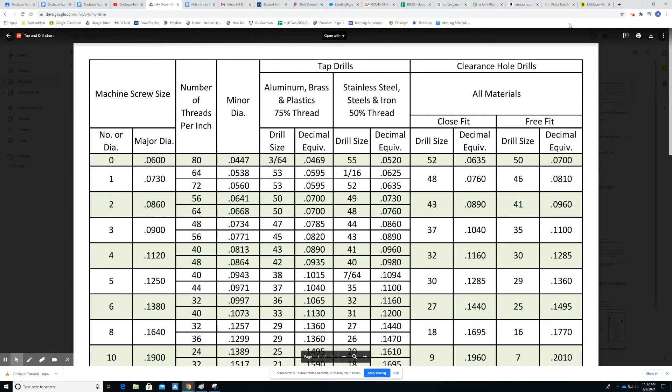All right, so for today, what we want to do is create a hex-shaped pocket in the back here. We're going to extrude that into the shape. When we assemble this U-joint, we're going to 3D print a couple of them and 3D print our swivel. And then we're going to use number 8 machine screws, but they can't go all the way through because then they would collide. You have 2 of them that need to share the same space in the middle.

So by putting short screws in here, and putting a nut here that they thread into, the screws will stay in place and they will hold the swivel, and the whole piece will be held together. This isn't how an actual U-joint would be drawn. We're doing this so that we can 3D print it and have a working U-joint.

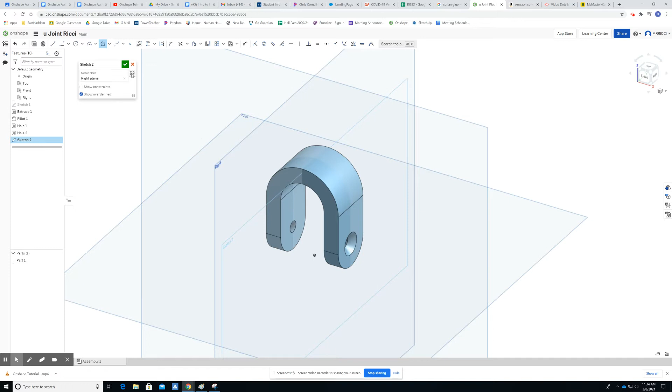All right, so what I'm going to do now is create a new sketch. Say okay to that hole. What did I do there? I did free fit. So I want to make sure that both my holes are free fit. They are. Good. Now I want to go to my sketch. I'm going to go on the right plane. And I'm going to pick my polygon here. I'm going to put that polygon right at the center of our through hole here.

I'm going to rotate this so that the polygon snaps so that the top edge of the polygon and this edge are parallel to each other. Okay, and then as I move away from the polygon, you can see that the number changes. That is how many sides our polygon has. So I'm going to move close so I get 6. It's a hex. That's how many sides our hex bolts have on them.

All right, and then I want a number 8 machine screw nut to fit into this pocket so that when we thread our machine screw through, it stays in place and it sandwiches it in here. And so to know the size of that nut, I need to use a reference for that. And what I like to use is McMaster-Carr. This is a website that sells just about any mechanical item that you can think of.

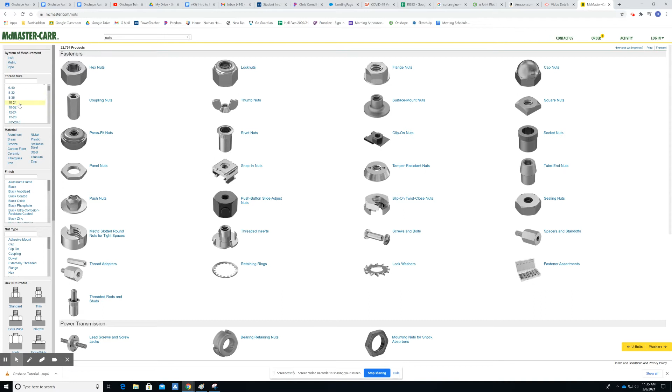I'm going to go over here to nuts. And then on this thread size over here, I'm going to go to number 8. And then I'm just going to pick this first one here. This is a low strength steel hex nut. And then I can look and see what size wrench would be used to tighten that. So I'm going to click on my product details here, and it tells me that across the 2 flats is 11/32.

Okay, I'm going to verify that with at least one other nut to make sure that it's not a specialty sized one. And so I'm going to look at this other one here. It tells me 11/32 for that as well. So I verified that 11/32 would be the wrench that I would use to tighten an 8-32 nut.

Okay, so I'm going to go back to my Onshape drawing. I'm going to put a dimension across, and then I'm going to type in 11/32. Okay, that's point.

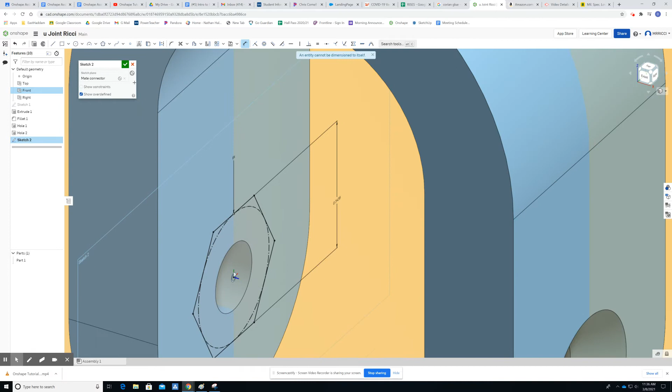Let's see here. So that's 0.3438. Okay, escape out of my dimensions. And then what I'm going to do is I don't want this to be an exact fit. I want to make sure when it's 3D printed that we still have some space to allow a nut to fit. So I'm going to give it a clearance.

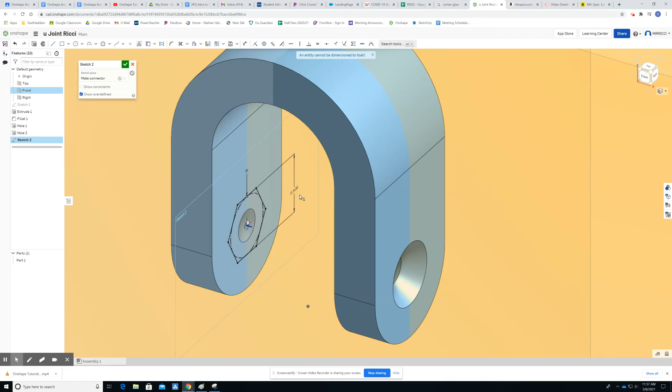All right, so my size is 0.3438. I'm going to add about 5 to 10 thousandths to that to make sure that it works. So 0.3438, to 10 thousandths, so I'm going to do plus 0.01. Okay, so that went to 0.3538, and that should be plenty of space for the nut to fit in there. We don't want it too tight. All right, I'm going to say okay to that sketch.

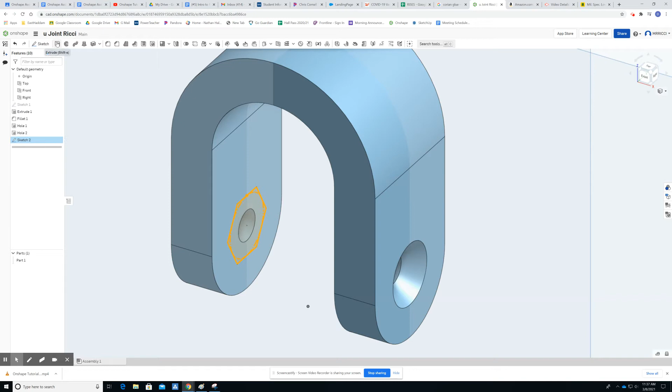I'm going to highlight the sketch, and I'm going to go over here to my extrude command. Okay, so I'm going to extrude this into the part, but again, I need to know what is the size of a standard number 8 nut. I'm going to go back to McMaster-Carr, and this one says it's 1/8, so 0.125. And again, like I did before, I'm just going to do my due diligence and make sure that's a standard size for that.

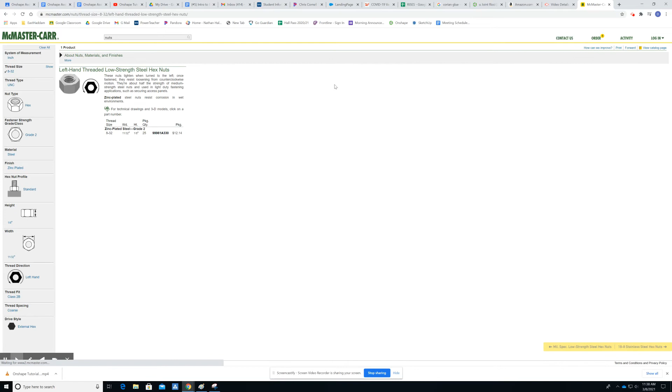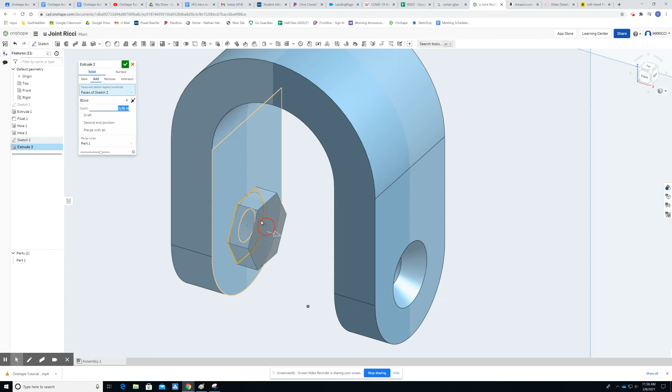So 1/8 here. Check this one out. 1/8 there. So 0.125 is the magic number for the thickness of that. So I'm going to put a depth here of 0.125. If you don't know the conversion on that, you could also just do 1/8. Okay. And then I want to change the direction. I want it to go into my part, and I want to remove it. Okay. All right, that looks good.

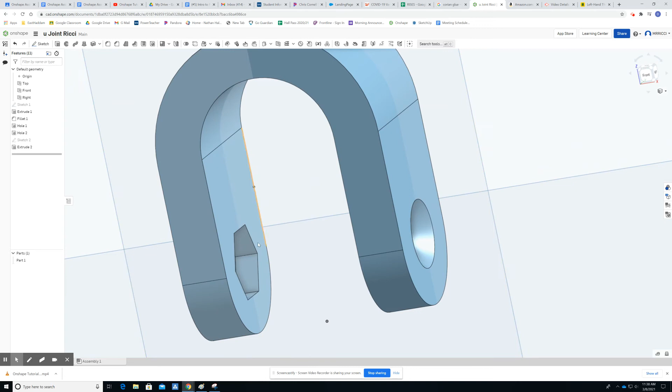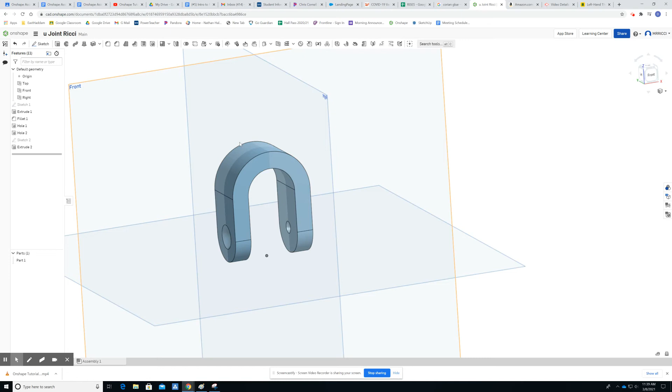So okay to that. All right, so now what we have is a pocket for a hex nut, and we have a countersink for a number 8 screw. We're going to make this hex hole in the opposite side as well. And one final step to this is we add the shaft connector for it. So if we look at a typical U-joint, it has a shaft coming out, which would be a boss sticking out that would be attached to a shaft so that it could be rotated. So we're going to add that as well.

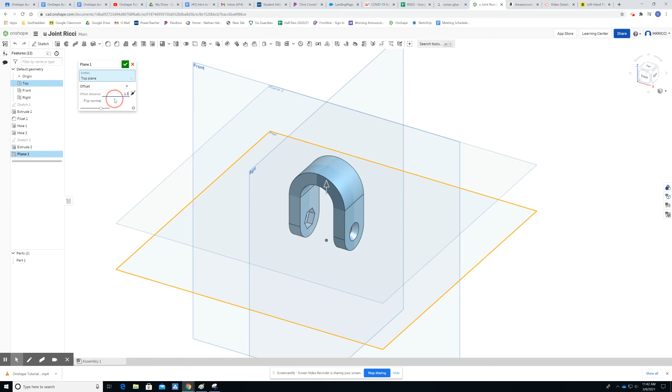The next thing I want to do is I want to add another plane parallel to my top plane here. Okay, so I'm going to go over to my plane tool. I'm going to offset a plane at 1.5 inches. And let's see here, which side did it go? Oh, no, that's down. So I can see that this is the line right here of the new plane. So watch it move. It's down below the top plane. This is above the top plane. I'm going to say okay there.

Once I have that plane, I want to draw a circle at the origin of the new plane. So I'm going to go over to my sketch, start sketch 3, and select the new plane as my sketch plane. Grab a circle. If I hover at the center of the new plane, you'll see that the original origin lights up. So I want to click there, draw that out. I'm going to make this 0.375. Enter. Once that is drawn, I'm going to say okay to the sketch, and I'm going to extrude that up.

I can pick any distance I want. Let's try 3/4, see how that looks. Again, this is not something that has to be exactly precise because this isn't a mechanical feature going into a part. It's just something we want to be able to 3D print and have it work and show how a U-joint works. So not real picky about the size and length of that, but we're going to go to extrude.

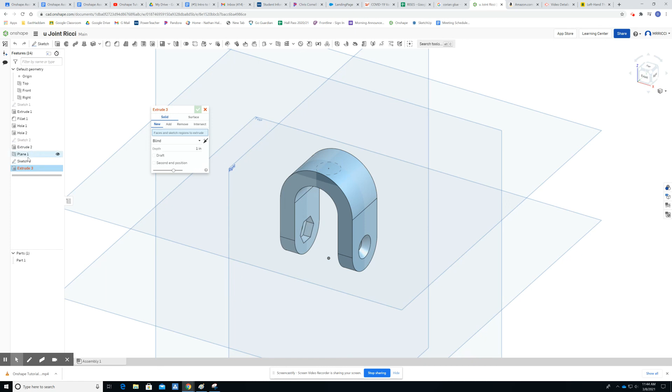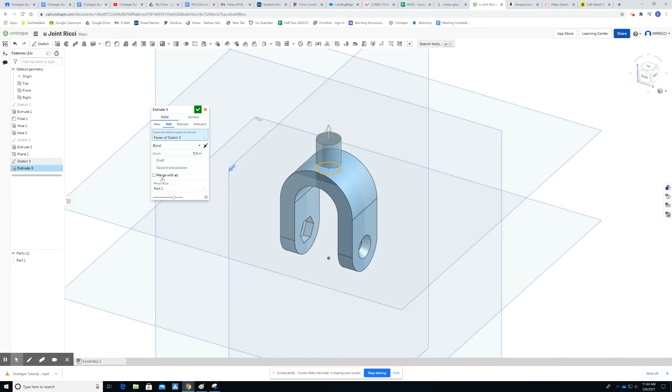And I'm going to extrude this up. Let's try 0.75 and see what that looks like. I think that's too far. Do 0.5. We want to add it and say okay. All right, so that is our finished product. The only thing that I didn't do that you will do is add the hex pocket for the other number 8 machine nut, and then we're done.

All right, so U-joint and swivel done. What we'll do is we'll 3D print these. So you need to create an STL file. I will share a folder with you on Google Drive for you to share your STL files with me. Please make sure that you are naming your STL file the same way that you're naming your Onshape parts. So it should be U-joint with your last name, and then it will be an STL. Okay, make sure it's a .stl at the end, and put those into Google Drive.